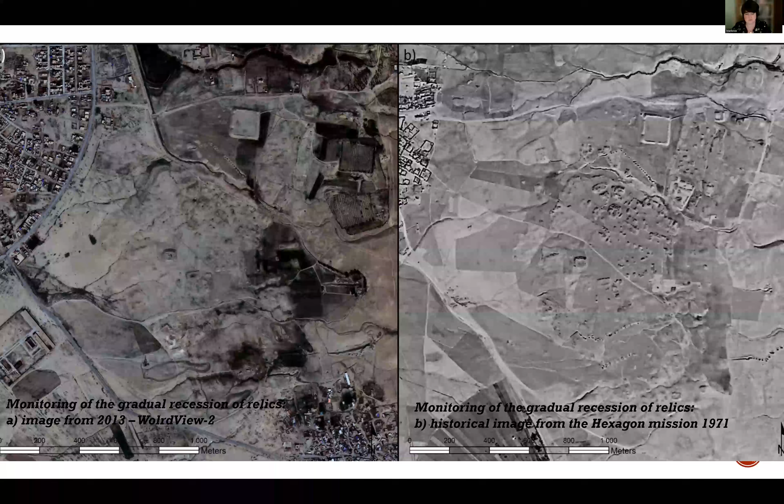But over some time, my research interests expanded also into urban archaeology and the documentation of the historic built environment. This is what I will focus on today, and I hope it will fit the excellent offer from the organizers of the summer school. When I checked the program, I saw that the documentation of archaeological and historical architectural heritage should fit into it.

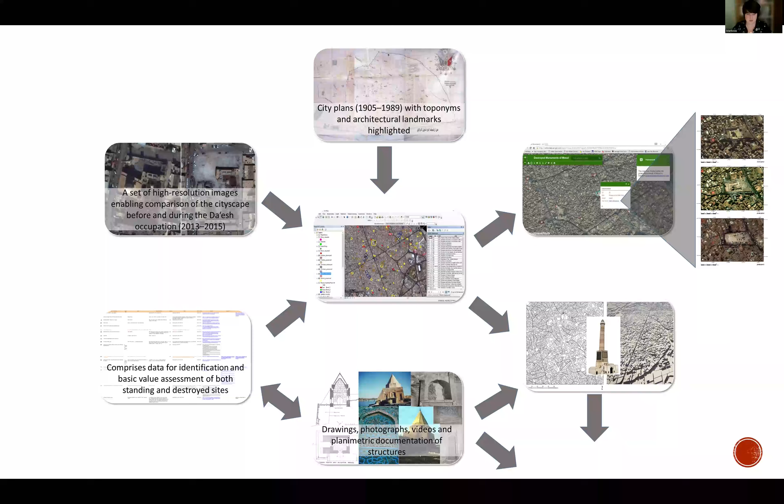This shift of my focus to urban archaeology in the Middle East reflects an increasing recognition that digital methods can provide invaluable insight into not only archaeological landscapes, but also architecture and urban heritage, especially where traditional methodologies fall short. In the context of archaeology and heritage conservation, 3D recording has become an indispensable tool. Two primary methodological pillars underpin this domain.

I'm speaking strictly about the areas of the Middle East we are working on. It's very different from the methodological approach common in Europe or other parts of the world, where you can easily choose which method you will use for documentation, or which historical dataset you will use as base layers for your project. But in the Middle East, we work only with a very limited historical dataset and strictly limited methodologies, meaning the technical equipment we are able to use. So I will focus on those which made very good progress in our work during the last few years.

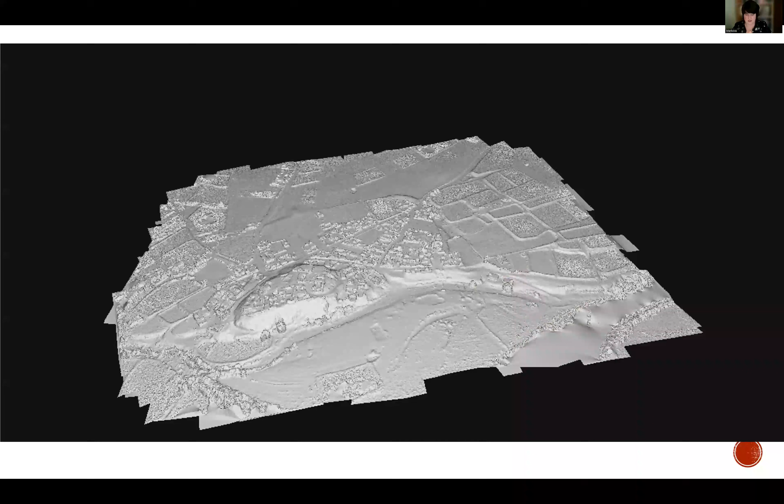The first pillar is photogrammetry. It's widely adopted in archaeology. It relies on sequential image acquisition, often referred to as structure from motion, which I'm pretty sure you are practicing or will practice during your summer school, and you will be great in it after you pass it.

The second part is the stereoscopic intersection technique. In my presentation, I have an example. We were focusing also on processing stereoscopic imagery from satellites. The stereoscopic approach, the traditional or original way, the beginning of structure from motion, can be very well applied even today, maybe not on photographs from a ground or drone camera, but with satellite imagery it works very well. It's amazing support when you need to fill gaps in your dataset, especially missing digital elevation models, which we commonly deal with.

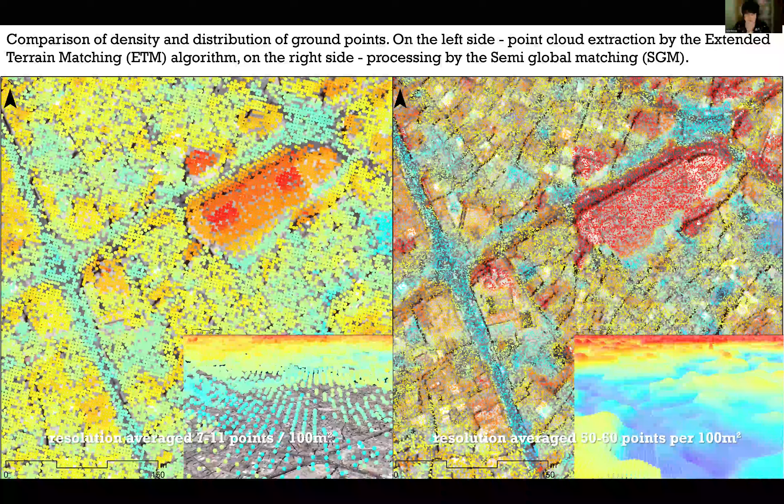From overlapping photographic sequences, we can extract the digital elevation model. We even tried some automatic detection of features based on segmentation of the elevated parts, in this case of the urban landscape of the historical city of Mosul, which we dealt with in the project from 2014 until 2020 or 2021.

The flexibility of photogrammetry in general, whether ground, aerial, or satellite, makes it equally applicable to landscapes. It is possible to use it for architectural structures or even for small artifacts.

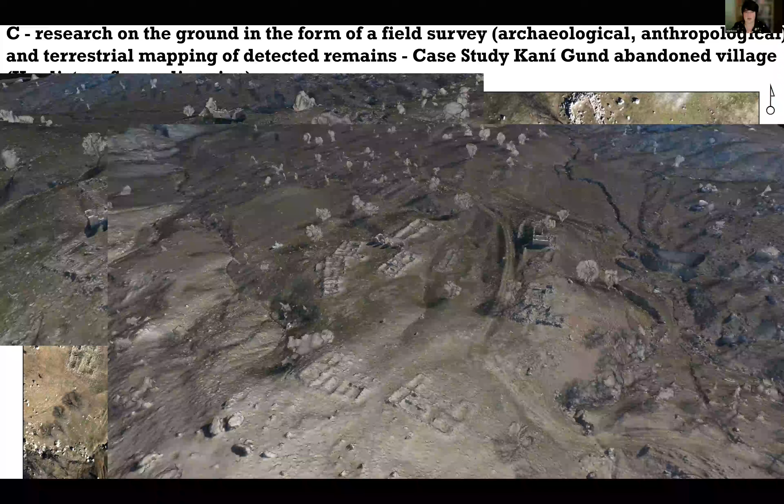Again, we are using it very often, as well as for the open landscape, and as well, as you see, for the still preserved remains of original traditional houses, coming in the case of this village from the medieval period, but those remains were developed hardly and deeply during the 18th and 19th century, and they are still very well preserved in the landscape itself.

Of course, the second approach or methodology, which we are very often and all the time pray to be able to use, is laser scanning. Again, as with photogrammetry, we can divide it into two groups: ground laser scanning technology and aerial laser scanning technology, mostly well known as LiDAR, which is very common in European archaeology. It's not the case in the Middle East, and unfortunately we are not yet able to use larger aerial vehicles which can hold the laser scanner and help us scan the structures from the air.

It's totally forbidden to even think about this technology because of security restrictions. So, fortunately, we are able to use the ground laser scanner as one of the most common and most usable technologies, which we are using for documenting mostly urban areas and individual historical remains of original architecture, even when it's partly or totally destructed, or even when it's still standing.

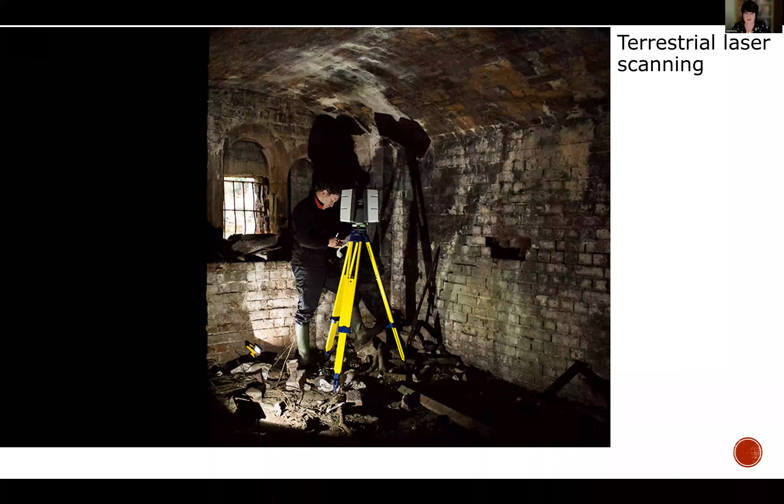The laser scanner can be divided into two groups. The first one is the static terrestrial laser scanner, which delivers a high precision, geodetically referenced dataset suitable for architectural documentation. The second group, which I will present during my case study, is the so-called mobile, usually SLAM-based scanners, which enable flexible acquisition in confined or hazardous spaces where static instruments cannot be deployed, which is very often our case. The combination of these two techniques provides complementary datasets, which are very suitable to create the hill-shaded textured 3D model.

We can use the basic technology for LiDAR, which is now implemented not only in Apple technology, which we are using very often, but in other small apparatus, which you can use as a cheaper alternative to the standard laser scanner, which is much more expensive, harder to transport, and harder to process the data.

So also from our usage of these basic, or I don't want to call it basic, but different ways of ground LiDAR, we are able to create suitable 3D models, even the ground plans, which are very often one of the main goals to get as a final result from any type of documentation of architectural heritage.

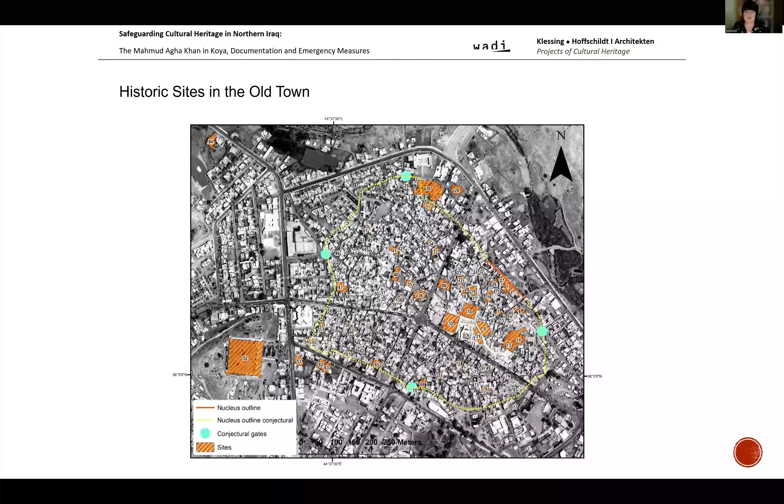And because we detected the collapse or destruction is rapidly increasing, we decided to ask for a rescue project. With support from the Swiss government, we asked for a grant from a foundation called ALIPH, which gave us rescue money, which was spent on the main dominant of this town of Koya, which is called Mahmud Agha Khan. You can see it in the middle of this picture.

This Khan comes from the mid 19th century under Ottoman rule. Its function was as a caravanserai. That means a multifunctional roadside inn or hotel designed to accommodate traveling merchants and their caravans, even the animals like camels, horses, and donkeys. Caravanserais provided lodging, stables, storage, and trading facilities, and thus were vital nodes in the historical infrastructure of commerce and cultural exchange.

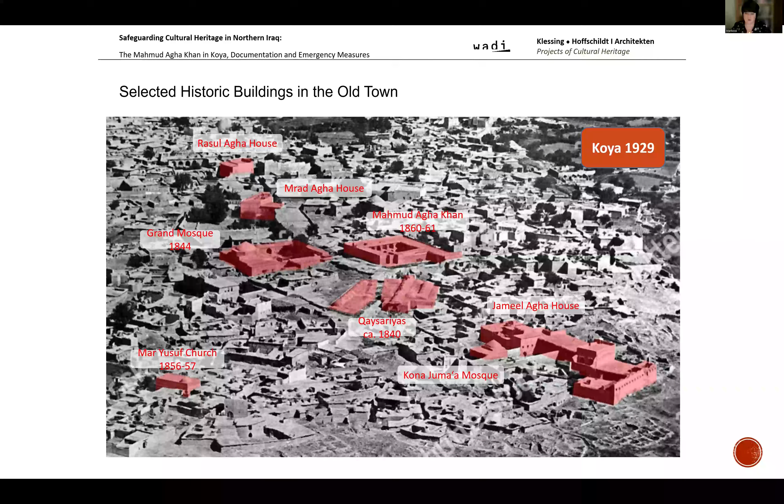We worked with a group of colleagues from Germany, who are architects dealing with rescue projects of restoration and stabilization of endangered architecture in the Middle East. We decided that first we would make a proper documentation of the current state of this Khani Gaura, and afterwards our colleagues from the architecture company would create two projects.

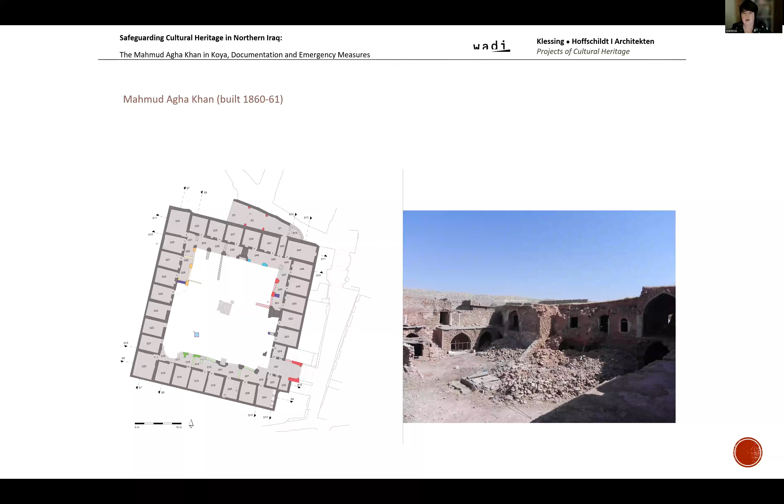So here, when you see the current state of the Khani Gaura, you can see that it's massively collapsed in some parts. And those parts which were partly collapsed, or even endangered rooms of the Khan, we decided to cover only with the mobile laser scanner because of safety reasons.

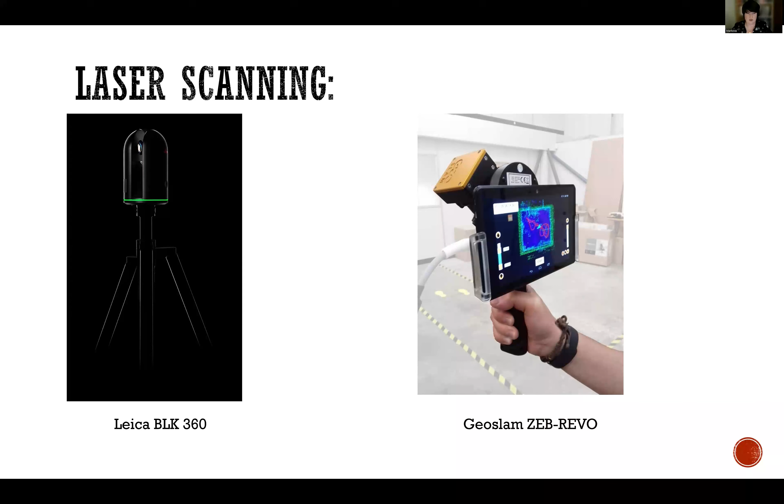When you are using the mobile laser scanner, it's totally okay to scan, for example, the interior of a room whose ceiling is ready to collapse, or has already collapsed, so there's massive garbage in it. You just need to hold the scanner in the room for a couple of seconds or tens of seconds with your hand and take it out. It's not necessary to stand the big laser scanner there and leave it there; you don't want to endanger such an expensive machine by any contact with material which could fall at any time from any part of the room, literally.

So you can see the outputs, first from the mobile laser scanner. This is the raw point cloud which we got from this part of documentation. Of course, the next step was to make a dense point cloud, which already started to look like a proper 3D model.

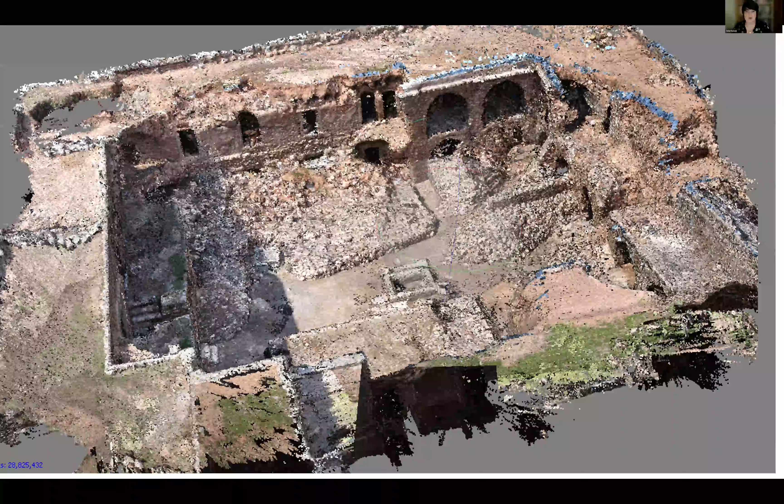Of course, with the mobile laser scanner, we weren't focused only on the interiors of the rooms, but since you hold it and move around the whole object of interest yourself, we scanned the whole object that was reachable on foot as well, to get a point cloud which could later be combined with the point cloud from the ground laser scanner to get the highest density of outputs suitable for interpolation for the raster output.

Here you can see the quality of the interpolated raster in the 3D model, and here is the result of the textured 3D model. At first sight it looks good, it looks very suitable, but please focus on the detail of the texture from the camera integrated as part of this mobile laser scanner. Right now I can say the quality is not very good.

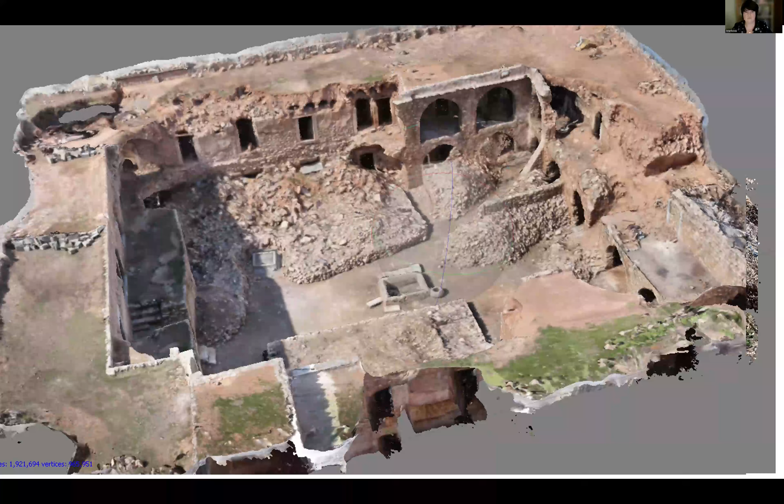This is the result of the scanning from the mobile laser. As you can see, we focused on scanning all the interior rooms, both on the ground floor and on the first floor. Some of them were really full of garbage, so it wasn't safe to scan them in a larger way.

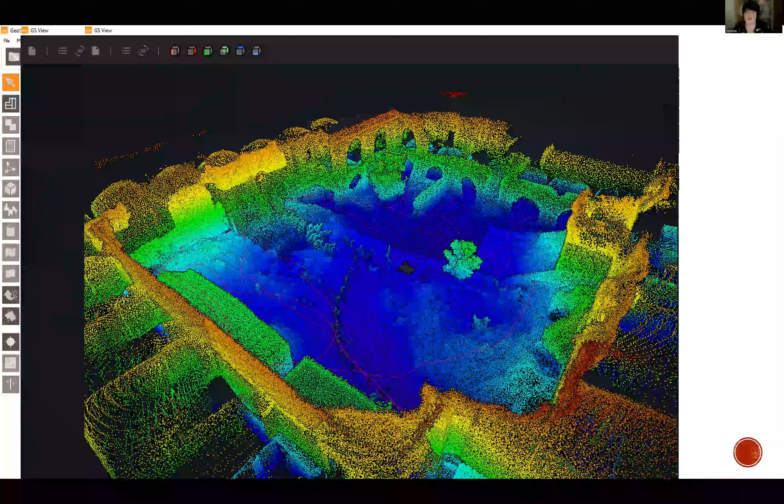But we try to do our best. In here, I hope it's visible a little bit. You can see the red stripes, maybe there's one better image. The red stripes, which are in the courtyard of the caravanserai, are the trajectories of the person who was walking with a mobile laser scanner.

In this part, I have to say that this scanning was done by our colleagues from the Czech Technical University, from the Faculty of Civil Engineering, namely Professor Pavelka and his son, of the same name. They were so kind and they were able to make the scanning for us and gave us all the data for processing.

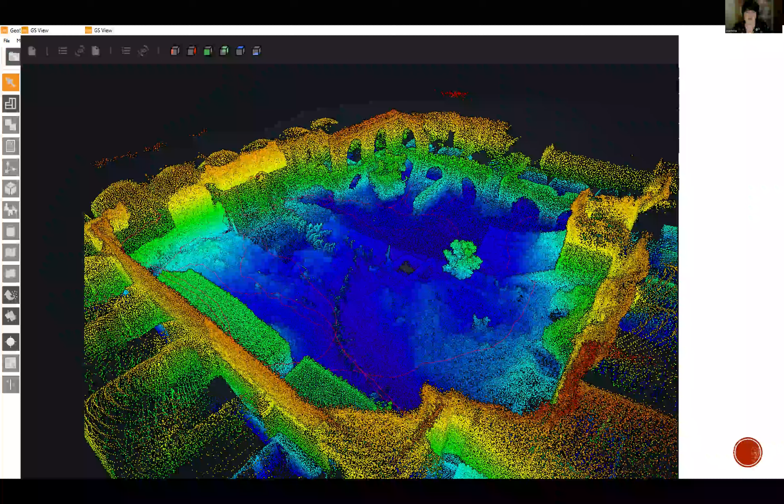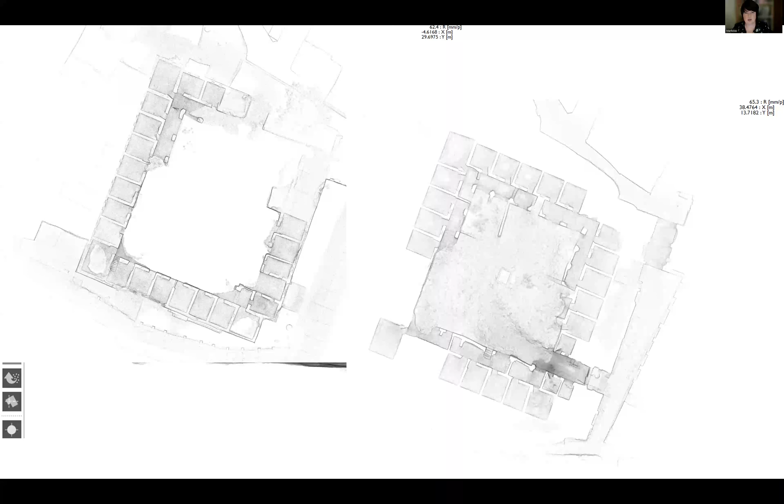In comparison to this, there is a view of the creation of the sections based on the mobile laser scanner. So we can get also the semi-automatic extraction of the ground plan. In here, it is still in the raster phase. Even we can do the sections. In here, we tried to use the semi-automatic extraction of the vector ground plan.

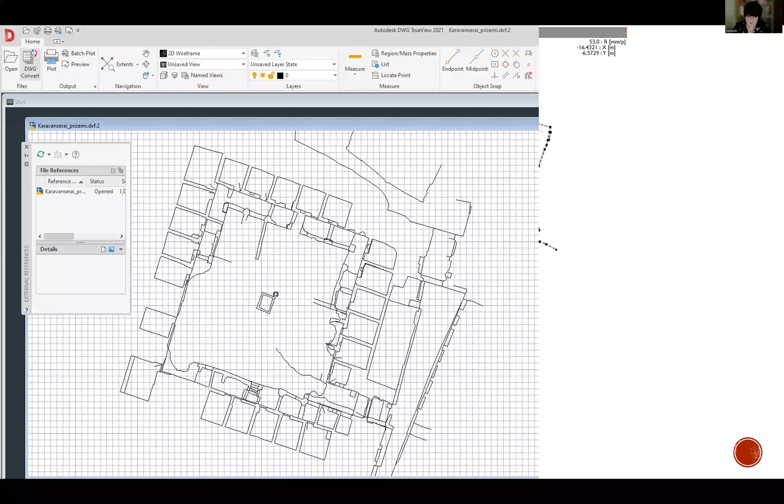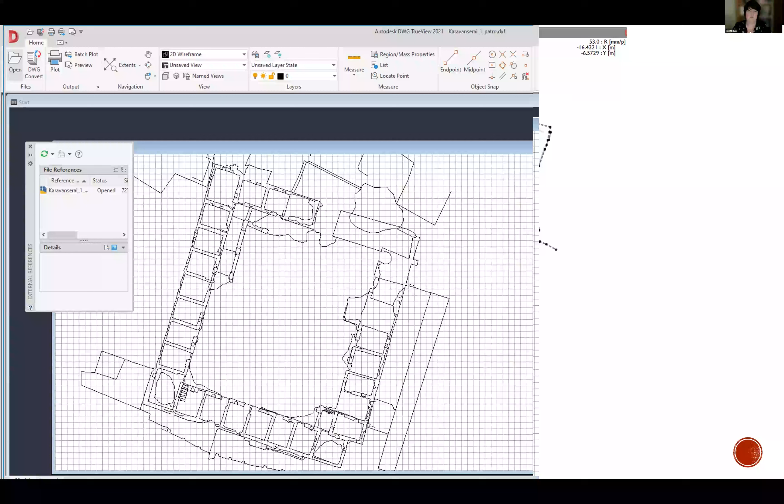It worked, but let's say 80% was successful, and 20% of the lines drawn by AI we had to correct by ourselves. But it spared a lot of our time, to be honest. So in the future, definitely we would like to focus also on this topic of semi-automatic, not extraction, but maybe redrawing the vector plans from the raster inputs.

This is how the second phase looked, using the terrestrial laser scanner. I'm pretty sure you already know it or you were in touch with it. If not, it works on the basis that you have to move it in a systematic way. The best way is to put the laser scanner on one stand from which you can see at least one, or best two, other stands to which the scanner will be moved.

This is because the point cloud output, which comes from every single standpoint, must be registered with the next one, both in elevation and spatially. So when you are preparing a scanning with this apparatus, you have to observe the building or object of your interest and create a mental map of the standpoints in your head. As I said, it's like a geodetic principle.

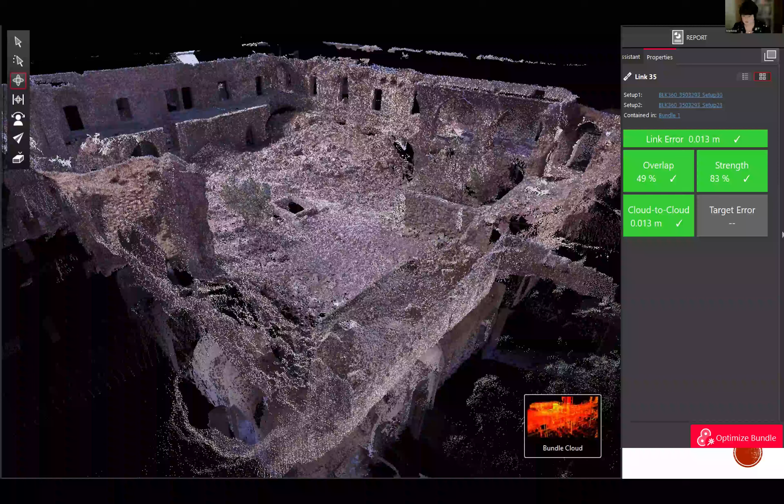From one standpoint the next two closest should be visible, which, as you can see, except for one standpoint at the entrance, was totally okay. That's why we got the results. This is the raw point cloud. It's not the dense point cloud, but you can definitely see the difference. Compared to the mobile laser scanning, already this raw point cloud is much more dense than the original one. And these are the outputs of the extraction of the ground plan.

Even in the ground plan extracted from this static laser scanner, you can very well see the differences compared to the previous one, especially in the courtyard, where the detail of the scan is much higher quality, in the 3D model, in the orthophoto, and in the extracted ground plan in hill-shaded colorization as it is in here.

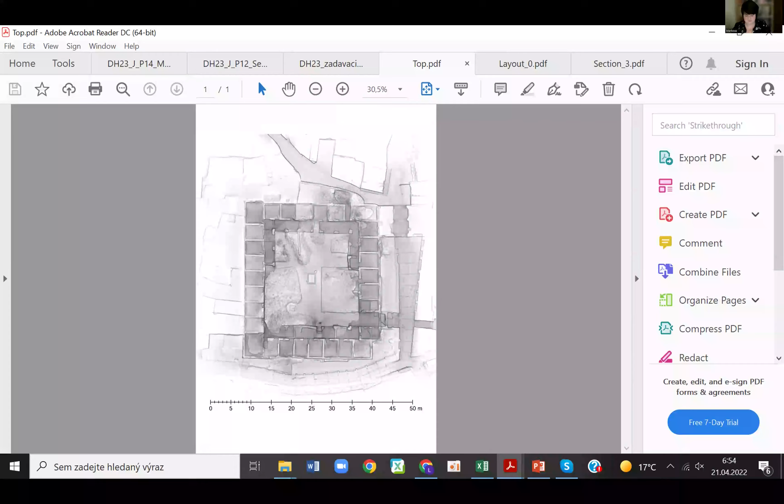Why did we decide to use drone documentation when we had reached such great, accurate results, which can easily serve by themselves as a base for creating the necessary outputs for the whole project? The answer is the texturing. As I said, the first scanner and the second, static one have integrated cameras in the body, but laser scanners are constructed to create a laser scanned 3D model. They are not created to make high quality textured 3D models.

And as you saw the quality of the textures coming from the laser scanner, you can understand why we decided to get better textures for the purposes of detecting the building phases of the object and some almost invisible cracks. It was very important for the architects, who need to mark them as possibly in danger for any part of the object. So it was needed to get as high resolution texture as we can get.

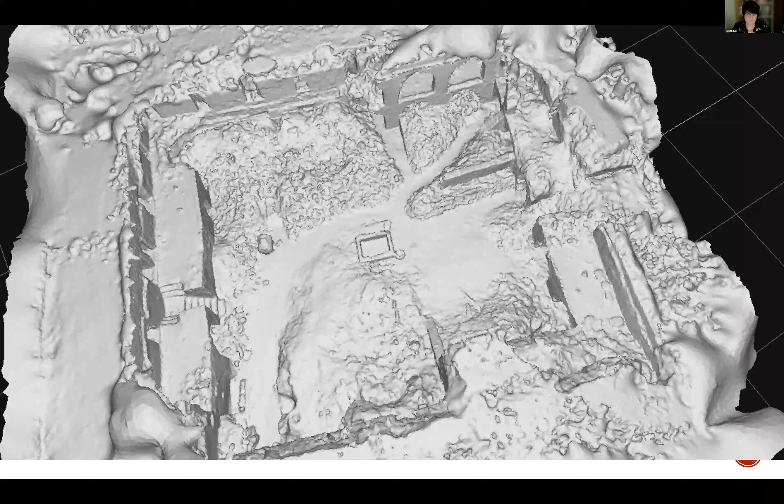So that's why we decided to do a classic photogrammetric documentation, structure from motion, from the drone. As I said, in this case we were using the small Mavic. Of course, we extracted also the 3D models, but the point cloud from the drone-based 3D models was not so dense and not so accurate as from the laser scanner.

But as you can see, the textures extracted from the drone photogrammetric result were much higher quality than from the laser scanning.

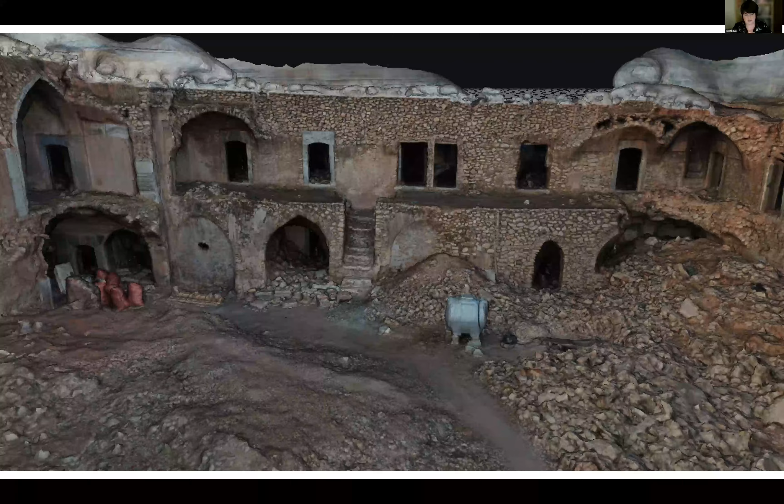Here you can see how the khan is looking right now. So these are the parts which we were focusing on. And even, of course, from the drone, we were able to create a vertical orthophoto, which again was used in two ways. At first, just to detect how the whole khan and especially the roof parts look like, and detection of the already collapsed parts or detection of any other cracks or endangered areas, which could easily collapse very

quickly. And because we were using the rover to get the registered point clouds from the laser scanner, but the quality, to be honest, of the differential GPS in the city center was not so high. We still have a mistake of the vertical accuracy about 10 centimeters and horizontal about 5 centimeters. For most of the archaeological purposes it is okay, but not for the architectural. If the architects ask you for proper documentation, the accuracy must be in millimeters, not these kinds of enlarged errors.

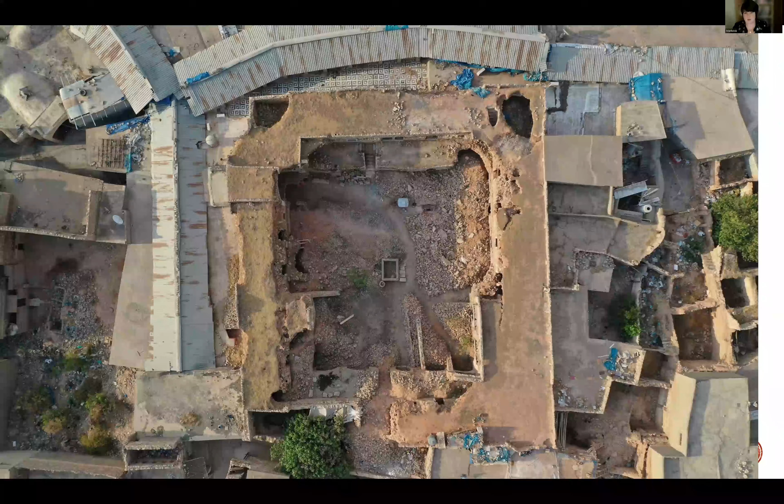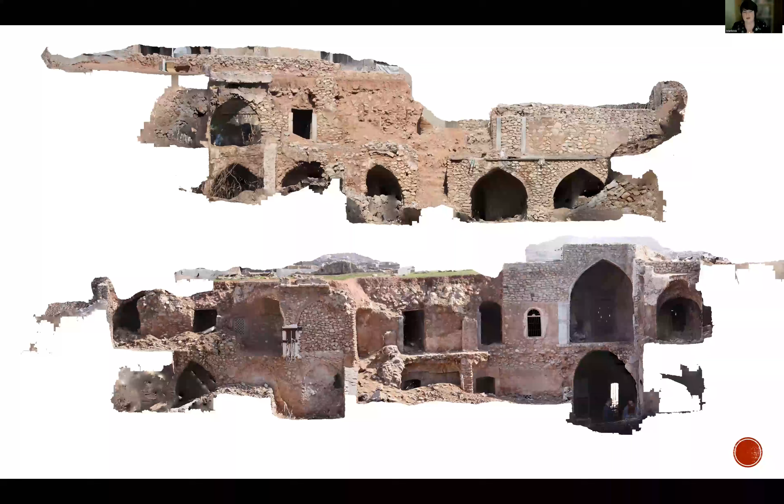From the drone technology, in combination with the laser scanner, because we were using the textures from the drone and applying them on the models, we were even able to create the vertical orthophoto views for the facades of the interiors. So we were using this also for these purposes of outputs, which are in scale, and immediately all the people can start to work on it. It's a high resolution detail, and the resolution of the outputted orthophoto is 2 or 3 centimeters. So it's totally enough to detect all the cracks, all the phases of the building and so on. So of course we made it for all four parts.

Now to the final part of my lecture. Okay, we got a lot of data. We, let's say, succeeded with the documentation. And now we should share it somehow with a lot of colleagues. Even with the local people, we promised them, of course, to share it. Even with the authorities from the General Directorate of Antiquities, which is one of the highest instances in Kurdistan itself, even with our colleagues from the architectural company, even for my colleague who is dealing with the historical development of the building, and so on. The most suitable way to share all the data is the creation of some platform in which you can upload all the data. It doesn't matter if it's a raster picture, a point cloud, a Word text file, a JPEG picture, a PDF or some CAD file, DXF, DWG.

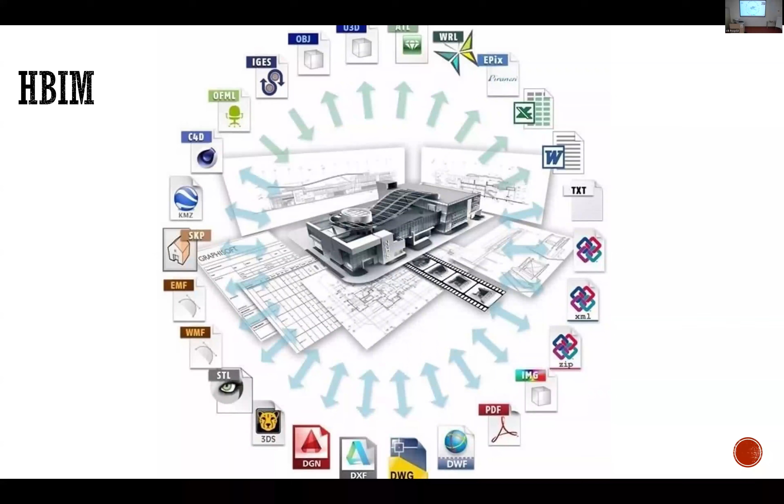Most of the offices and the state institutions are not equipped with the proper technology, but it slowly develops as a style or a way to deal with large data sets, even with large data sets coming from 3D modeling and 3D documentation. In our case, because we created this project 4 years ago, I would like to proudly say to you that we were using the proper HBIM database systems from some software which we bought, but we did not.

We didn't get a foundation for that, so we created a little bit punk-style HBIM system designed by our colleagues from the Czech Technical Institute, but it worked. Right now we are transporting all the data to a proper database system, and we will use the open source system called FreeCAD. If you want to start with HBIM, FreeCAD is a great start. It's very easy to access this program, and you can check the possibilities it offers.

From the commercial offer, the most common are Autodesk Revit, Archicad, or the Bentley OpenBuildings Designer. To be honest, I'm not very familiar with them. I know how it works, I know what it is for, I know the structure, I know how to work with it, but how to create it is something quite different from archaeology.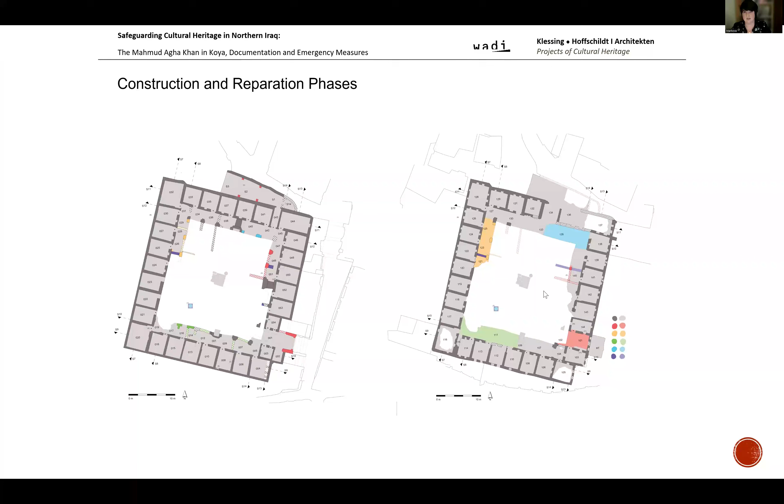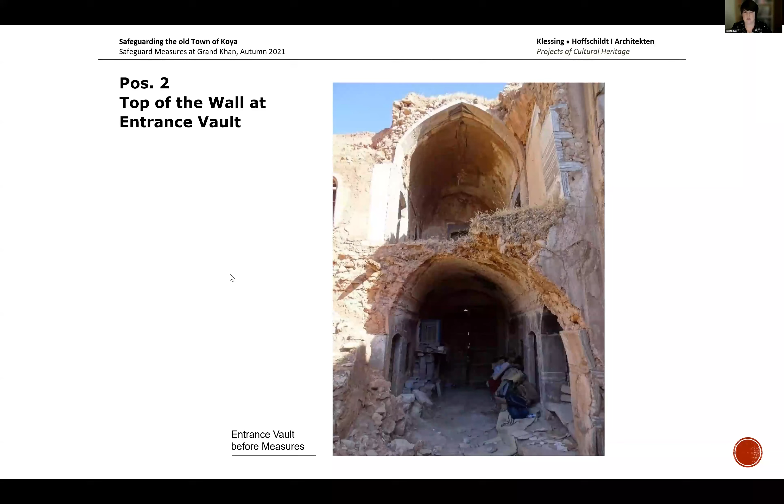Here you can see how the HBIM works. It's based on the 3D model, in our case also on the ground plans, in which you can easily detect the phases of the building chronology of the Khan. The architectural drawings were placed there too. All this is in one file. Imagine it's like one website or one database in which you can find all these data. And of course, the photographic documentation is also implemented, with textual comments and interpretation.

You are also looking at the already processed stabilization phases, which were done as a next step after the documentation phase. Those were done under the supervision of the German colleagues, but all the work was done by local people, which helps a lot, because the integration of local people has a reciprocal positive effect: they feel they are part of the restoration. They are proud of it. And for us it was great to hire them because they know the traditional way of building this specific architecture, which is quite different from the European style.

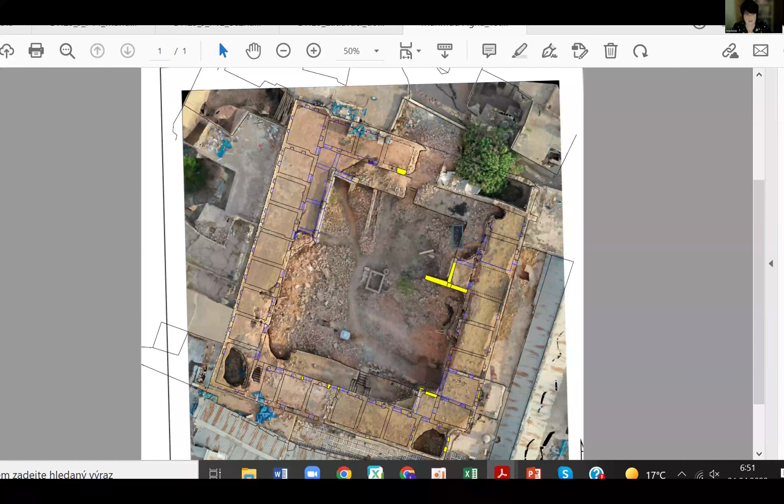And here you can see the final output, as I promised. You can see the interpretation plan in vector form, created based on the laser scanner, in all the details and all the phases, and georeferenced on the orthophoto from the drone to get the most accurate output, which we are still working with, and to be honest, still looking for a bigger funding project to save this excellent Khan of Koya for future generations.

In conclusion, if I should reflect on the usage of the techniques, the Koya project demonstrates both the strengths and limitations of current methods. The strengths: laser scanning ensured accurate geometry, photogrammetry provided high quality textures, and the integration of methods achieved a holistic representation. Those are all the positives. But there are also some limitations.

The laser scanning generated a really massive data set, which required extensive processing time. And the biggest issue we were dealing with: we had to decrease the quality of the 3D model handed over to the local people, even to our colleagues, because they don't have proper hardware to open it. So that's another question you can think about.